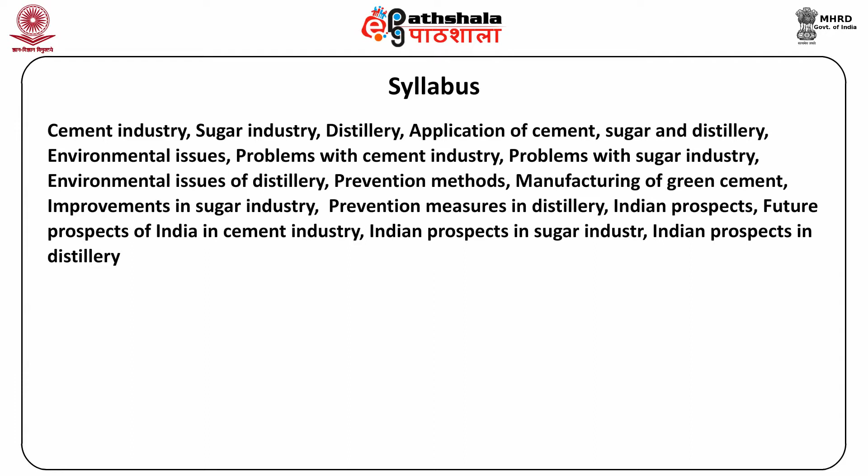After going through this module, you shall be able to know about cement, sugar and distillery. Learn about the processes involved in their production, identify the problems and environmental impact in producing cement, sugar and alcohol, evaluate solutions to reduce destruction and protect the environment, and analyze future plans to enhance production while keeping in mind their impact on the environment.

Let us begin with the cement industry. The cement industry plays a crucial role in the infrastructural development of any country. As the population of a country grows, construction activities increase in both public and private sectors, generating a huge demand for cement, which is the raw material for any construction. These activities are undertaken by both the central and state governments for developing housing projects, office spaces, roads and other infrastructure.

Cement is basically a binder. It binds a substance that sets and hardens as the cement dries. Cement also reacts with carbon dioxide present in the air and can bind other materials together.

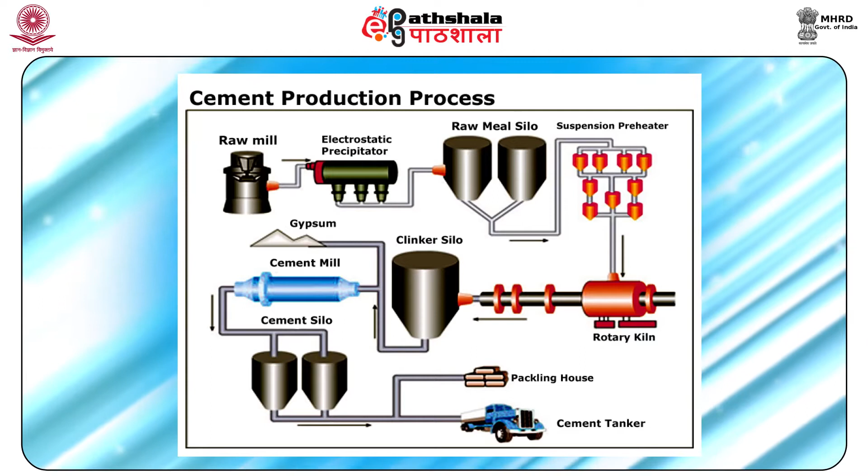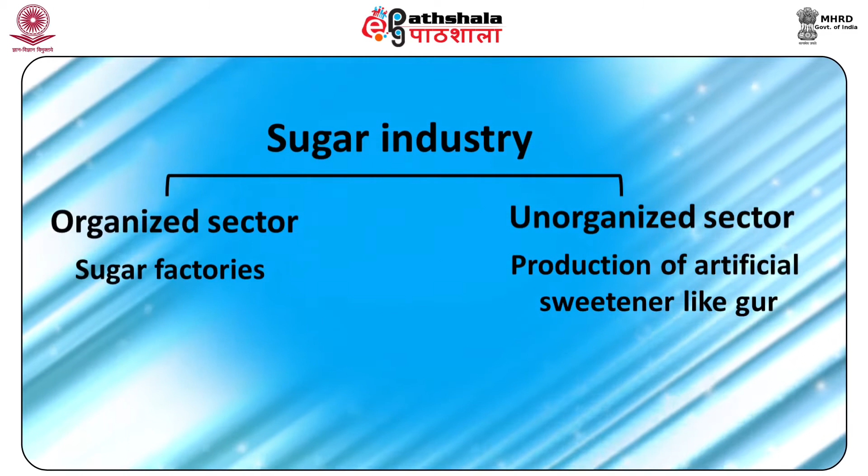Let us now have a closer look at the sugar industry. The sugar industry is divided into two sectors, the organized and the unorganized. The organized sector covers sugar mills producing sugar from sugarcane, whereas the unorganized sector takes into account small farmers or small scale industries producing traditional sweeteners such as gur.

Distillery: a distillery is basically the industrial manufacture of alcohol by the process of distillation. Distillation is a physical process which involves the separation of components of a liquid by vaporization and condensation. It is a non-chemical process with universal industrial application.

Distillation permits separation of air into its components, mainly oxygen, nitrogen and argon, for industrial use. In the field of industrial chemistry, a large range of crude oil products and products of chemical synthesis are distilled to separate them either from other products, from impurities, or from unreacted starting materials. Distillation of fermented products produces beverages of high alcohol content.

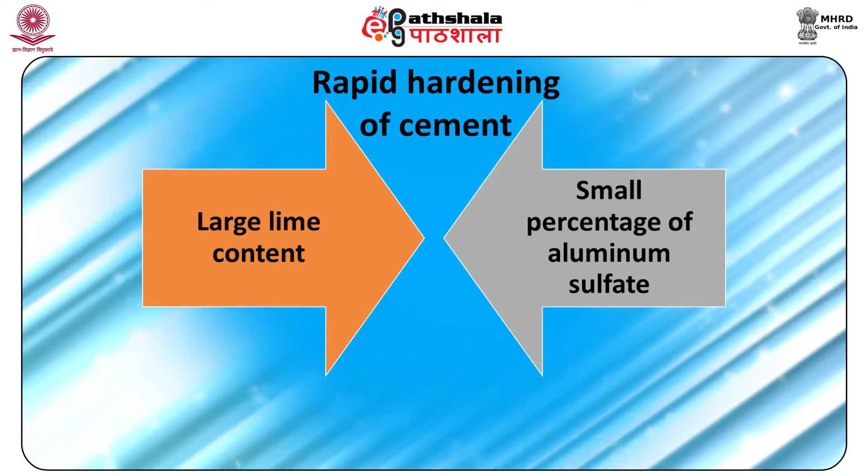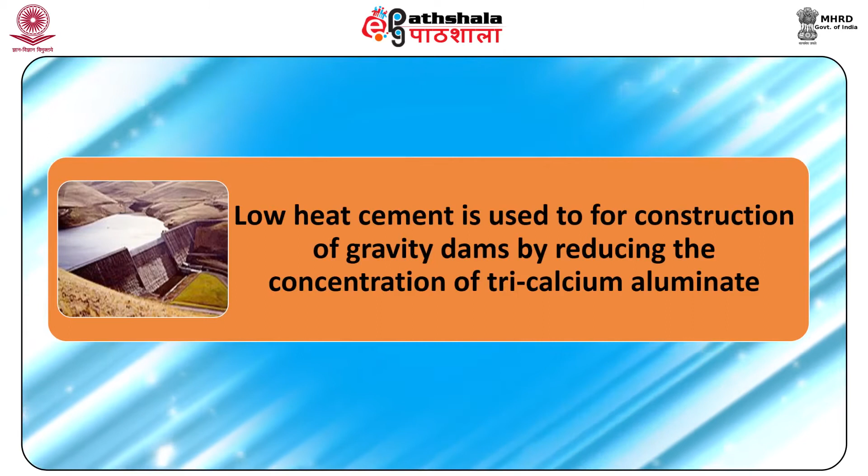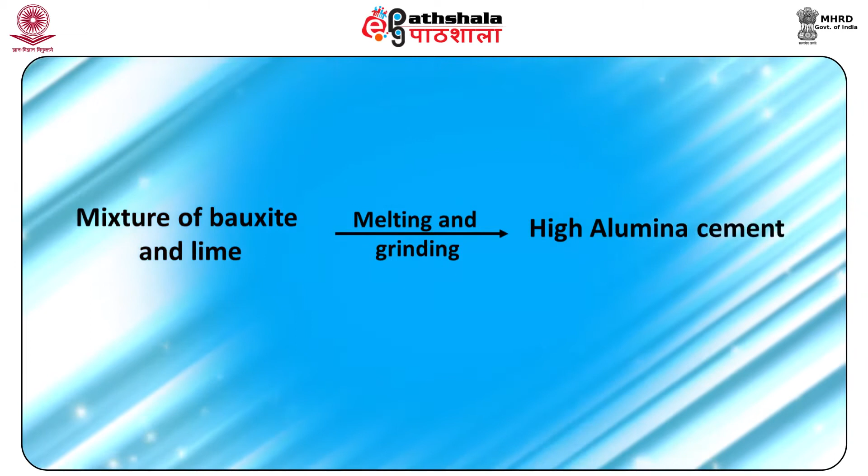Low heat cement is used for construction of gravity dams by reducing the concentration of tricalcium aluminate. High alumina cements are used for construction in high temperature regions. It is obtained by melting and grinding the mixture of bauxite and lime.

White cement is used for architectural purposes like to precast curtain walls and facing panels. It is more costly than ordinary cement and is prepared from raw materials which do not contain iron oxide.

Colored cements are made up by mixing several mineral pigments with ordinary cement. It is used for decorative works in floors.

Applications of sugar industry. Sugar plays an important role in the manufacturing of food products. Nutritionally, sugar produces energy and economically, it is the most efficient foodstuff. It is obtained from sugarcane and has a very high calorie content.

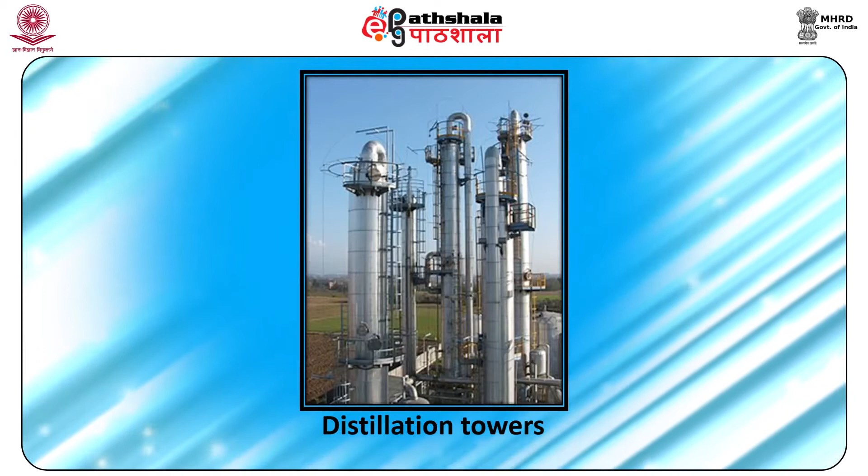Alcohol has industrial use in medicinal, pharmaceutical and flavoring purposes. Despite the many environmental issues, utilization of alcohol can't be reduced. In industry and for several exercises in the laboratory, there is requirement of alcohol. Spirit is also manufactured in distilleries and is used in polishing and removal of paints.

Environmental issues. Manufacturing of cement and sugar causes environmental impacts as the processes include emission of dust and gases causing air pollution. Also, noise and vibrations produced while operating the machinery affect the environment.

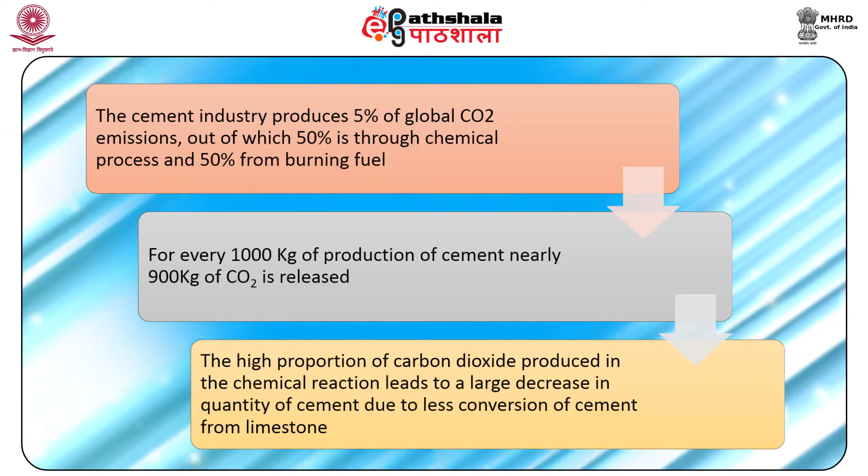So, to reduce the transport of heavier raw materials and to minimize the associated costs, it is more economical for cement plants to solve this issue.

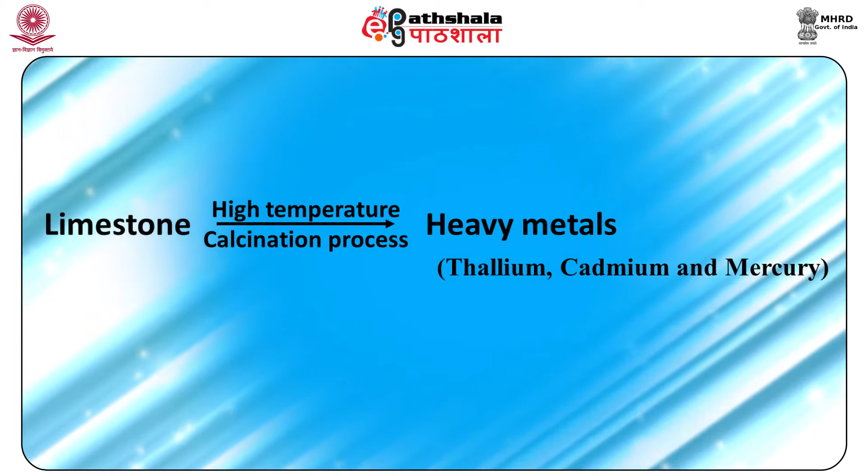The second problem associated with the cement industry is the presence of heavy metals. The high temperature calcination process of limestone releases volatile heavy metals such as thallium, cadmium and mercury, which are very toxic. The presence of heavy metals arises both from natural raw materials and from the use of recycled byproducts.

The high pH prevailing in the cement pore water, which is between 12.5 to 13.5, limits the mobility of many heavy metals by decreasing their solubility and increasing their sorption into the cement mineral phases. Nickel, zinc and lead are commonly found in cements in high concentrations.

Let us now move on to the sugar industry. Sugar is consumed every day by all of us. It has a unique importance, but its production damages the environment. It is estimated that about 145 million tons of sugar is produced in 121 countries across the earth per year.

It affects the surrounding soil, water and air. It is responsible for loss in biodiversity due to destruction of habitat by heavy use of agricultural chemicals.

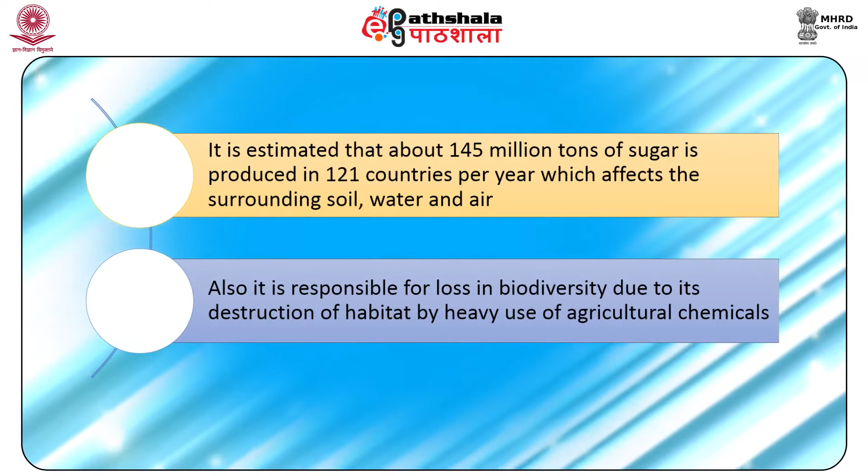The disaster of the Great Barrier Reef in Australia is an example of destruction caused by excessive sugar production. In this disaster, water around the reef suffered from large quantity of effluents, pesticides and sediments from sugar farms.

Also, in Papua New Guinea, the fertility of soil decreased by 40% due to heavy cultivation of sugarcane for sugar production.

Air pollution associated with the sugar industry. Sugar mills use bagasse as fuel in boilers. Fly ash is the main waste causing air pollution, which includes unburned bagasse and carbon particles. Fly ash is very light in weight and contains a large percentage of fine particles. These particles settle on vegetation and damage it by clogging the pores. They also have physiological effects on animals and humans, like irritation in the eye, nose, throat and lungs.

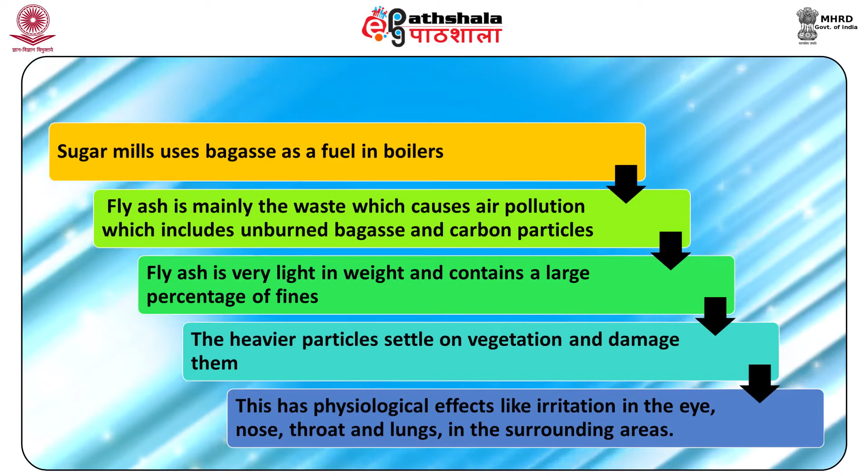Sugar industry also causes water and land pollution. In the production of sugar, large amounts of water are used for irrigation purposes, resulting in discharge of polluted wastewater. It is estimated that sugar mills generate 98 lakh tons of sugar and 0.16 to 0.76 meter cube of waste for every ton of cane crushed. Also, about 45 lakh liters of wastewater is generated by sugar mills per year. This wastewater, when discharged, gets mixed with water resources. It decreases the level of dissolved oxygen in water bodies, making water unfit for fish and other aquatic life forms.

Also, when the wastewater is discharged on land, it causes land pollution as the organic waste clogs the pores in the soil. There are also some ethical issues associated with this, including strikes by farmers demanding excess payment, which results in higher prices of sugar in the market.

Let us now look at the environmental issues associated with distilleries. The manufacturing and consumption of alcohol both have bad effects on human health as well as on the environment. The consumption of alcohol causes liver damage, slows down the central nervous system, and affects cognitive thinking.

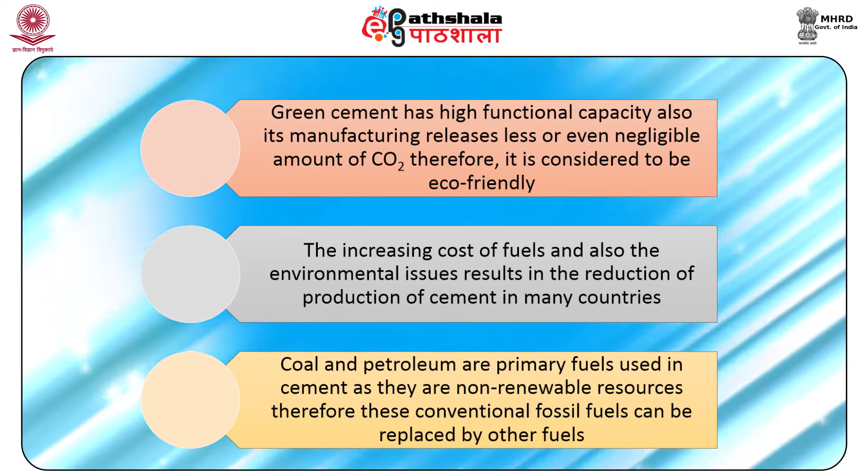The increasing cost of fuels and environmental issues result in decreased production of cement in many countries. Coal and petroleum, the primary fuels used in cement manufacturing, can be replaced by other fuels as they are non-renewable sources of energy. The waste and byproducts which contain useful minerals such as calcium, silica, aluminium, and iron can be used as raw materials instead of clay and limestone.

The cement industry in India is focusing on cost control, upgradation of continuous technology, and increased construction activities. India's cement industry needs to nearly double its manufacturing capacity by 2025. In addition, major cement manufacturers in India are also increasingly using alternate fuels, especially bioenergy like solar, wind, thermal, etc. With ever increasing industrial activity, real estate, construction, and infrastructure development across the country, there is a growing demand for cement.

Let us now have a look at the improvements that can be made in the sugar industry.

Bagasse is used as a fuel in furnaces. These furnaces should be upgraded in order to control air pollution. A number of sugar mills have already installed wastewater treatment plants and air pollution control equipment. Cooling water should be recycled instead of released as wastewater. Recycling of condensates and cooling water helps in minimizing the amount of wastewater, and it also helps in conservation of water.

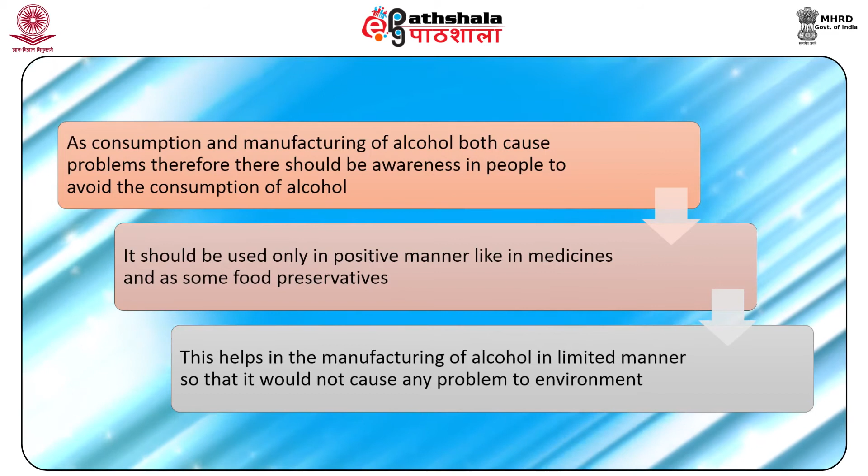Preventive measures that can be taken in a distillery. As consumption and manufacturing of alcohol both cause problems, there should be increased awareness in people to avoid the consumption of alcohol. It should be only for medicinal purposes or as a food preservative. This helps in manufacturing alcohol in limited quantities so that it does not cause any problem to the environment.

Let us have a look at India's prospects. India is one of the leading countries in production of cement and sugar. Due to the environmental issues involved in production, the Indian government has taken steps to improve the manufacturing techniques. The future plans made by the government can remove these problems and also enhance the economy of the country.

Future prospects of India in the cement industry. The Indian government is focusing on further improving infrastructure activities to boost economic growth. The infrastructure potential of India is huge, and it is expected to become the world's third largest construction market by 2025. Increase in infrastructure activities results in expansion of cement industries as per the growing cement demand.

Some of the major investments and developments in the Indian cement industry are: Ambuja Cement Company plans to invest rupees 802 crores in a number of projects. Prism Cement Limited has become the first Indian company to get the Quality Council of India, QCI, certification for its ready-mix concrete plant in Kochi, Kerala. The company received the certification from the Institute for Certification and Quality Mark, ICQM.

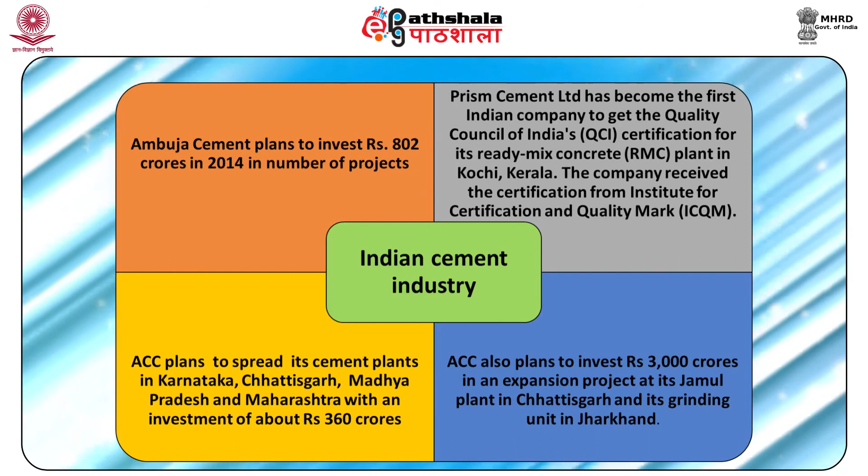ACC also plans to spread its cement plants in Karnataka, Chhattisgarh, Madhya Pradesh and Maharashtra with an investment of about Rs 360 crores. It also plans to invest some 3,000 crore rupees in an expansion project at its Jamul plant in Chhattisgarh and a grinding unit in Jharkhand.

Indian prospects of the sugar industry. Sugar, which is made from sugarcane, was discovered thousands of years ago in New Guinea. It was in India that sugar crystals were first produced by boiling the juice obtained by pressing sugarcane.

There are 453 sugar mills in India, the maximum sugar producing industry in any nation. The cultivation of sugarcane generally takes place in the states of Uttar Pradesh, Maharashtra, Gujarat, Tamil Nadu, Karnataka and Andhra Pradesh. Uttar Pradesh alone accounts for 24% of the total sugar produced in the nation.

Indian prospects of the distilleries. India is the fourth largest producer of ethanol in the world and the second largest in Asia. India produces about 2.75 million liters of alcohol per year.

Though the production of alcohol from starchy material is also practiced in India, it is on a very limited scale. Most Indian distilleries use sugarcane molasses as the raw material. The first distillery in the country was set up at Kanpur, earlier Cawnpore, in 1805 by Carew and Company Limited for manufacturing rum for the army.